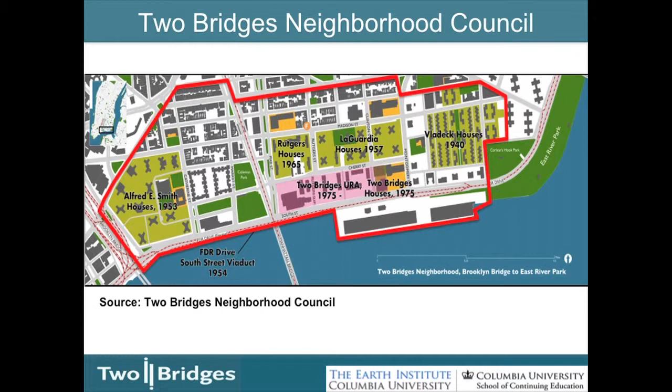This is a community that's facing a number of issues. More than 30% of this area lives below the poverty line. More than 80% of these residents live on a low to moderate income in some form of housing subsidy. Air quality is a legitimate concern in this area, given that they're located so close to the FDR Drive, both Manhattan and Brooklyn bridges, and there's an older building stock in this area.

Hurricane Sandy really exposed a lot of the vulnerabilities to this area for obvious reasons if you've lived here in the city. And more than a third of this area is below an elevation of 10 feet or less. And it was through establishing a close relationship with our client that we were really able to better understand these issues. And we realized, given the constraints of the project in terms of time and the capabilities of our client organization, that we weren't necessarily going to reduce the widespread impacts of another Hurricane Sandy, but we did maintain the capabilities to help address some of the issues that they face, including some climate risks such as increased precipitation.

And it was around discussing these issues that we had a connection with our client around green infrastructure and established our mission, which is to develop a series of green infrastructure demonstration projects to help push back against a lot of the issues this community is facing, knowing that the benefits of green infrastructure can not only mitigate flooding, but also improve air quality and improve access to green space.

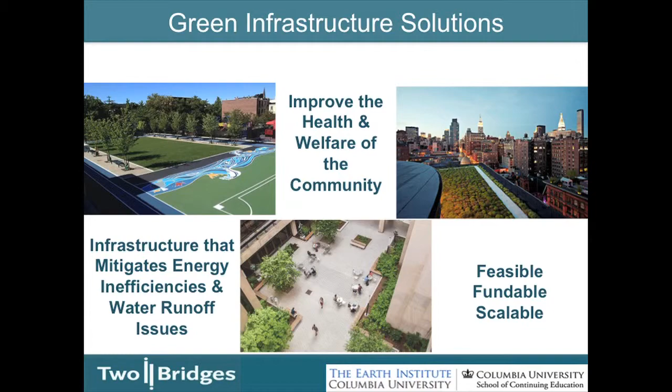And we wanted to make sure that all of these projects were feasible, fundable, and scalable. Feasible being capable of being managed within the capabilities of our client organization. Fundable, knowing that if there isn't funding available or easily attainable, the projects aren't likely to be successful. And scalable, capable of being replicated elsewhere throughout the community and to highlight some of the benefits that green infrastructure can provide.

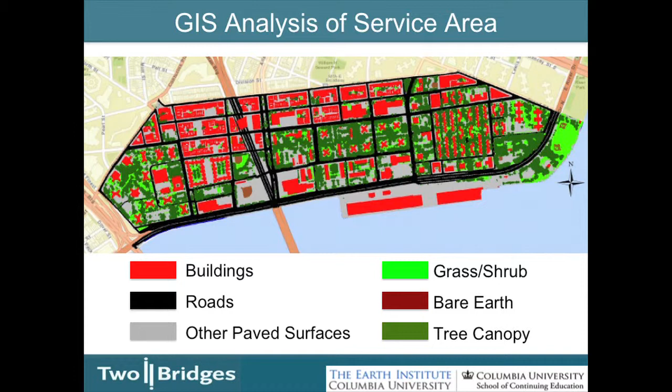So we started our project essentially by performing a comprehensive analysis of this neighborhood using GIS to better understand the land use and get some data context around our problem, which ultimately results in a deliverable for our client to provide them with relevant data to help better inform their decisions in prioritizing their sustainability efforts.

And like I said, there were a lot of vulnerabilities in this area. It also helped us understand what areas are most vulnerable, because even though not every storm is going to be a Hurricane Sandy type event, regular flooding is a problem in this area. After each rain event, there is an elevated number of calls to the city's 311 system reporting issues with flooding and sewer backup.

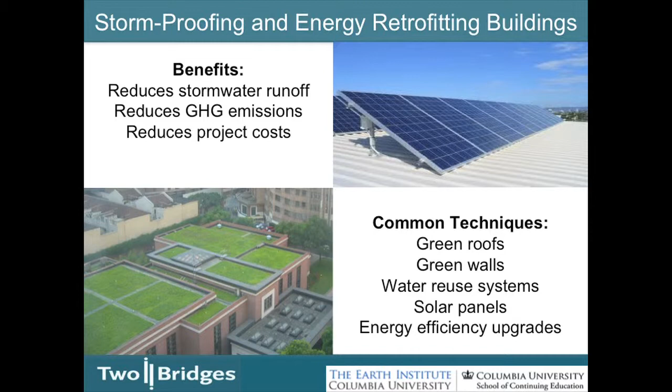So an obvious area to focus on was buildings. It represents a large category of the land use of this area, and we know that using green infrastructure can not only reduce flooding but help improve even energy efficiency in buildings. And that's very critical to this area in terms of maintaining the level of affordable housing available to the residents. And so we looked at techniques such as green roofs and green walls and energy efficiency measures.

And ultimately, we are recommending a variety of interventions for the properties that are under direct ownership of our client. At 80 and 82 Rutgers Slip, the Two Bridges Neighborhood Council owns 2 multifamily buildings with more than 300 units that are dedicated to housing families living on a low to moderate income. And as I said, we also want to make sure that there's funding available for these projects. So one recommendation, such as a green roof that is included in our paper, can receive funding through the city's green roof tax abatement program.

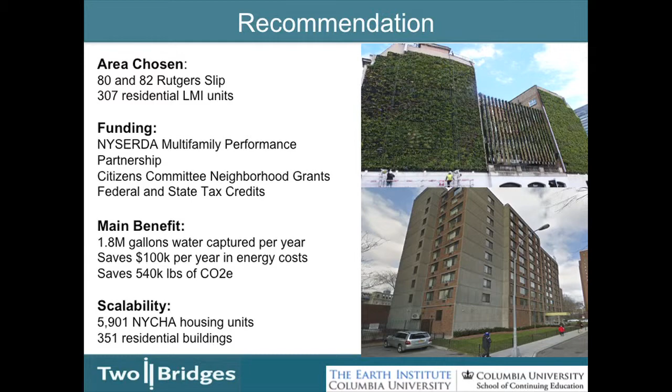And while we were evaluating these buildings, we also looked at non-green infrastructure opportunities, including energy efficiency, having them tap into some money that's available through HUD to improve the weatherization of the building, and also how they can best spend some of their post-Sandy disaster recovery funding, including maybe relocating their utilities above base flood elevation.

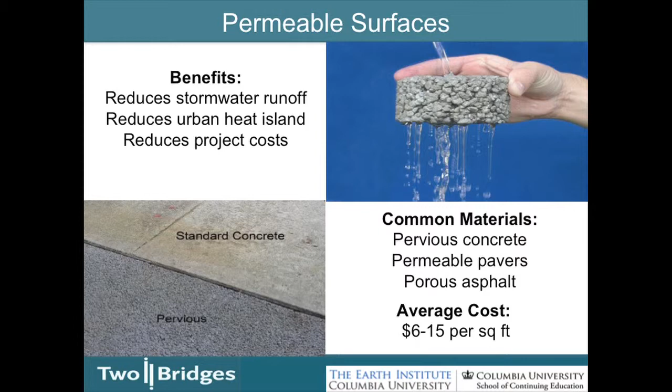Next, we were really intrigued by the amount of impervious surface coverage in this area. More than 30% of the area is covered by streets, sidewalks, or otherwise paved areas. And we really wanted to take a look at how we could reduce some of that impervious surface coverage, looking at techniques such as pervious concrete, permeable pavers, and porous asphalt.

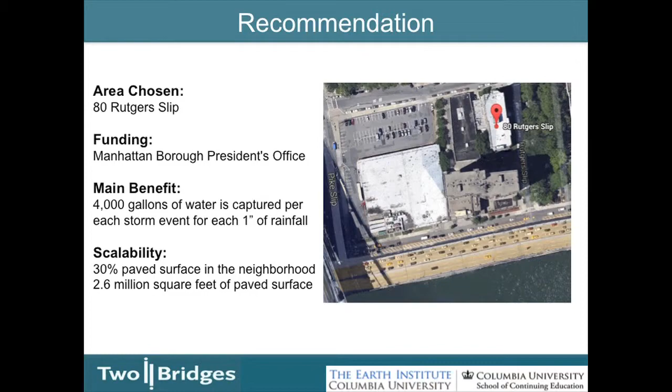And again, on the property that is owned and managed directly by our client, we found a substantial amount of impervious surface coverage that in the near future is going to need to be upgraded and replaced, and we're recommending that they do that using a porous concrete material, not only for its benefits of reducing potential runoff, but it's a more durable material and possesses higher reflectivity properties that help it reduce some of the solar radiation that would normally be absorbed by asphalt and contribute to issues like urban heat island.

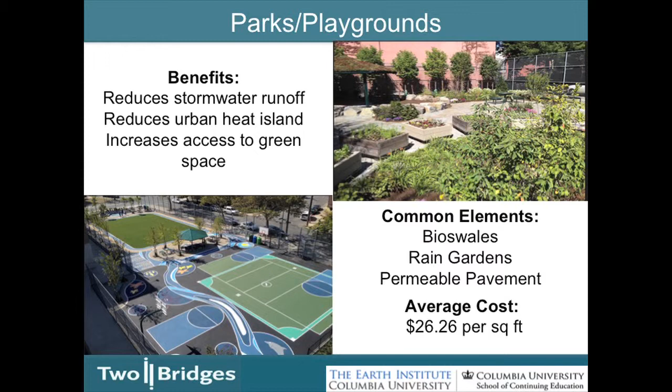And lastly, we were really intrigued at taking a look at parks and playground space, not only for the opportunities to include green infrastructure, but knowing that these are areas where the public congregates and has access to, as opposed to even private buildings. We looked at measures such as bioswales and rain gardens. And when looking at the areas in which we could apply these techniques, we focused on the area's schools. The area has 9 public schools, 2 of which were inundated during Hurricane Sandy.

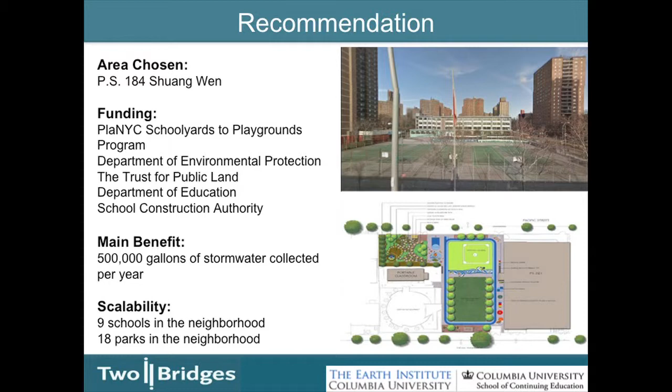And in researching all of our funding, we found a program that we're recommending that the neighborhood council and the school apply for, which is the city's Schoolyards to Playgrounds program, where they can take a school that is eligible, like this one, because it is located in a lower income area, is located in a combined sewer shed, and has the surface area needed to meet eligibility, and take underutilized space, closed off during the school year, covered by impervious surface, and transform it into an area that is accessible by the entire community and include green infrastructure elements to not only reduce flooding, but using natural elements help improve air quality and increase access to green space.

In the program, schools have been successful in receiving anywhere from $500,000 to $800,000 in funding, and one project has been successful enough to remove more than 500,000 gallons of stormwater runoff each year. But most importantly, perhaps, this is the school where our client hosts their after-school science education programs.

So it's not just about adding green infrastructure, it's also about educating this community and creating awareness as to how green infrastructure can help improve their lives, knowing that green infrastructure can help improve air quality in an area with the second highest rate of asthma cases in all of New York City, reduce the amount of flooding in an area that lies lower than its surroundings, and increase access to green space in an area with little of it.

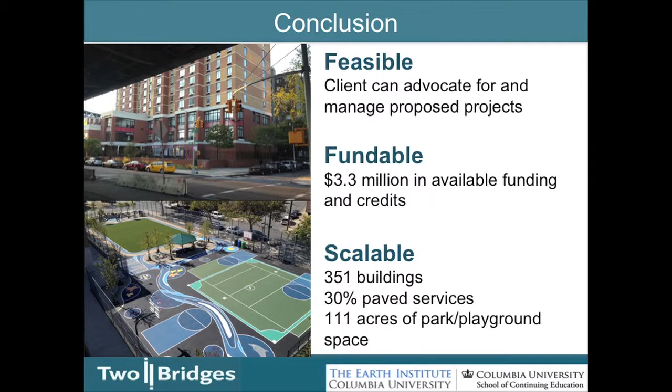And I believe that our projects are feasible. Our client has the capabilities to manage, understand, and advocate for these projects. We've identified as much as $3.3 million in available funding and credits. And there is also an opportunity to educate and advocate to get these projects replicated elsewhere in the community, so that these projects serve as a demonstration of how this could be scaled up to receive those benefits at large. Thank you.

Questions for Chris? Yes. Were there any language barrier issues, just given the site? Absolutely. The neighborhood is 58% Asian. That's the largest demographic, and they speak 6 different dialects of Chinese. So not only is that an issue for communicating the benefits of green infrastructure, but it's a barrier for our client in general to get their mission across.

Other questions for Chris? One more here. You talk about reducing stormwater runoff. Where does the runoff end up? The Lower East Side is in a combined sewer shed. There are 4 CSO outfalls located across that section of the East River. So whenever the system is inundated and it's not capable of being pumped to the Newtown Creek wastewater treatment plant, it tips over directly on the east side of the FDR.